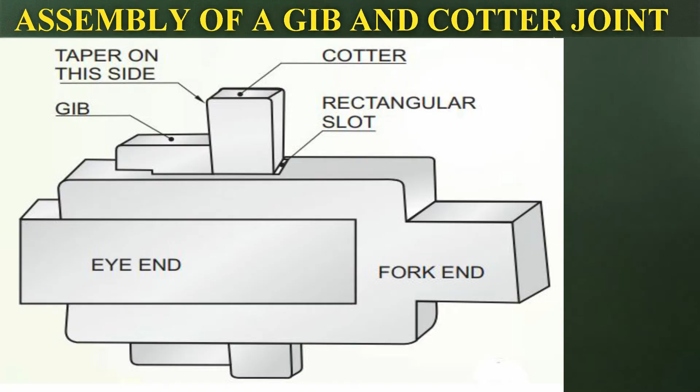Now I will try to explain it using a model of this joint. This is the first rod or first element of this assembly, the fork end. As you can see, the cross section is square, or for this section it is like a rectangle, so rectangular or square section. From the front, this is the front view, and from the top you can see this hole. This is the hole for the cotter and gib.

Next element, the second rod. From the top you can see this is the slot for the cotter and gib. The other two elements are the gib and cotter. This is a cotter, this is a gib, and this side of the gib and the same side of the cotter is the common or matching side. The other two sides are parallel to each other and perpendicular to the central axis.

Also, for the slots for gib and cotter on both rods, fork end and eye end, generally the ends are perpendicular to the central axis and flat, because the tapered side is common for both and the matching side is the tapered side. So you don't have to worry about the taper in this joint.

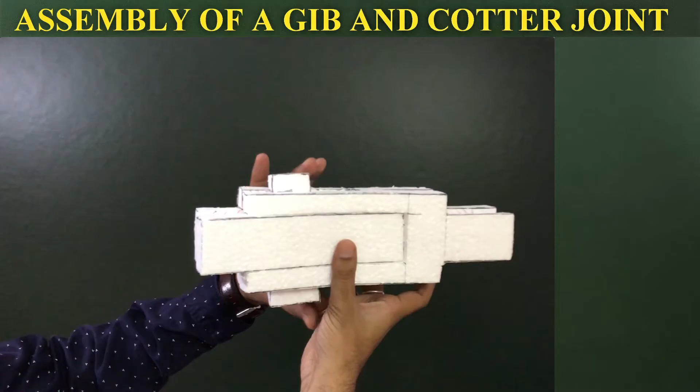Then we can insert this gib like this in the cotter slot, and then we'll push it towards the eye end. After pushing it in this direction, these projections are going to lock this gib on the fork end. Then we can hammer this cotter like this. So this is the final arrangement or final assembly of this joint, right?

Now from the front, this is the front view. From this side, this is the side view of this assembly. The cross section is a square, this is for the fork end, these lines are for the gib, and this last one is the cotter. And from this side, again this is the side view: square, then rectangle, then cotter, then gib, right? And from the top, this is the top view of the assembly.

Now the other thing is clearance. How to decide the amount of clearance, or how to draw clearance in the assembly? Again, I'll try to explain it. This is my first rod, the fork end. Then this is the second element, the second rod, the eye end. We'll insert the eye end like this.

And in this assembly, okay, now it's better. In this assembly, these are clearance: first clearance, second clearance, and this is third clearance in blue color. So this is the amount of clearance after assembling all these parts of this assembly.

And the view in front of you is similar to full sectional view. So in full sectional view, we have to show section portion for fork end, for eye end, and we don't have to hatch for cotter and gib. So this is the front view, sectional front view of gib and cotter joint full in section.

Now we'll start a problem. So first problem in gib and cotter is from pictorial view. So from pictorial view to orthographic views. Problem statement: the figure shows the exploded pictorial view of a gib and cotter joint. Assemble these parts correctly and then draw the following views to scale 1:1.

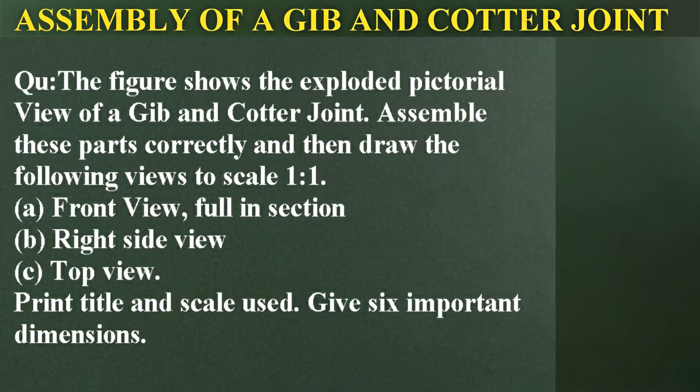First, front view full in section. Second, right side view. Third, top view. Print the title and scale used. Give 6 important dimensions. In the problem figure, fork end and eye end, these two rods are given in pictorial form or pictorial projection. For gib and cotter, given figure is orthographic. So we'll start from fork end.

First, fork end SQ30. Different dimensions are: first is SQ30. SQ30 means square of size 30. So for fork end, the dimension or size of the square is 30. So 30 by 30 is given to us. Second, total length is 112. So this length from this corner to this corner, total length is 112.

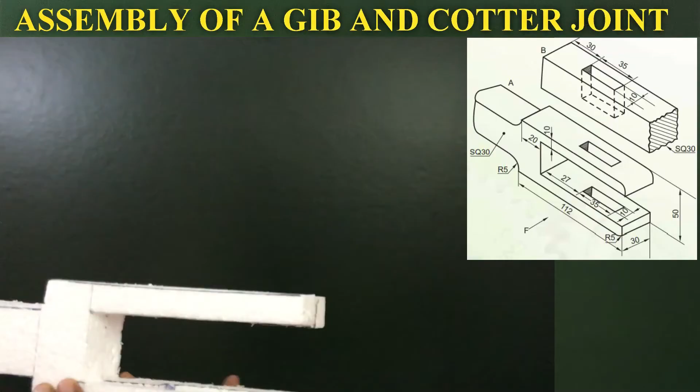Then 30. Okay, so if this width is 30, this must be 30. Then we have 20 distance of inner corner or inner face from this side. So this is 20, this is 20 in the figure, and then after 27. So for cotter slot, this distance is also given to us 27. So from this corner to this point, 27, and slot width 35.

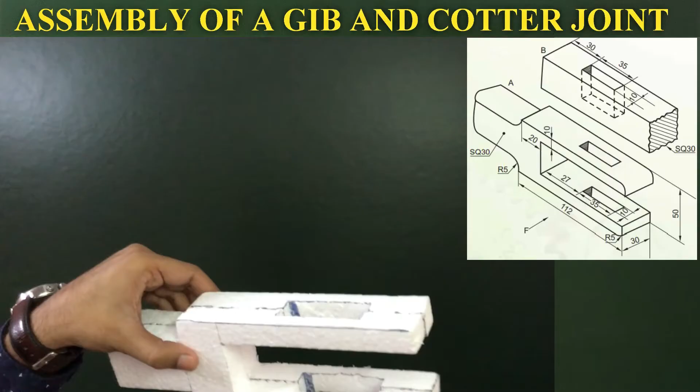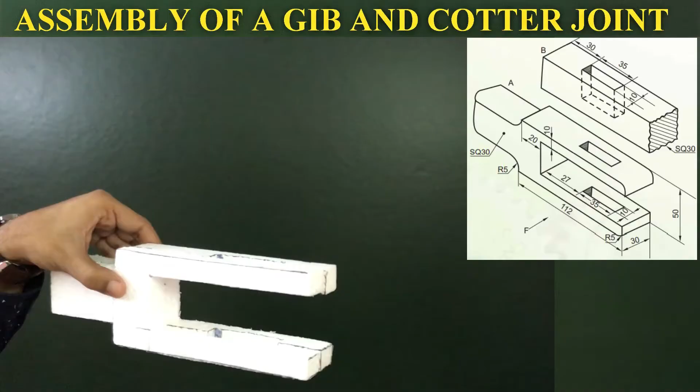And what about upper height? Okay, this height is 10, this is also 10. So 10 plus 10, 20, 20 plus 30, total must be 50. Yes. So this height is also given to us 50. So total 50, upper 10, lower 10, and middle portion of size 30.

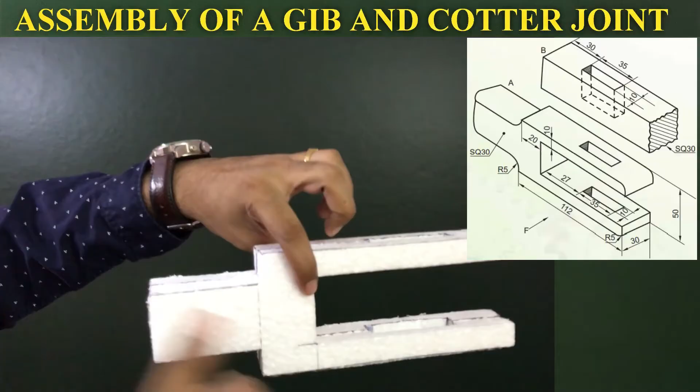Okay, one more thing is given to us, R5. Yes, so in my model these corners are sharp corners, but in your problem figure these are rounded or fillet corners. So we have to use R5 fillet radius for construction work.

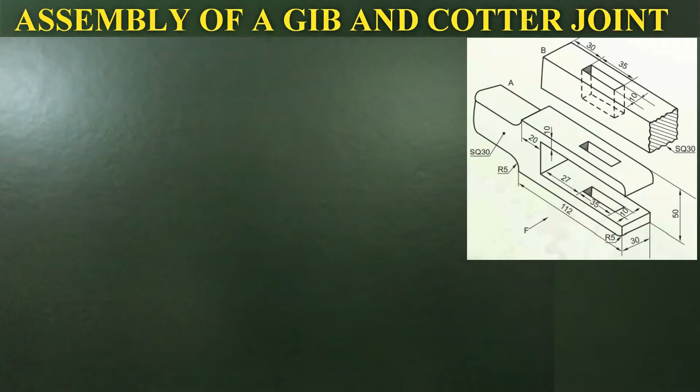Next, eye end. So for eye end again SQ30. So the size of this rod is 30 by 30. Then 30, 35 and 10. Okay, 10 is the thickness of cotter slot. So for eye end, this is 30, this is again 35. So cotter plus gib slot width is 35 for both, and this slot thickness is equal to 10.

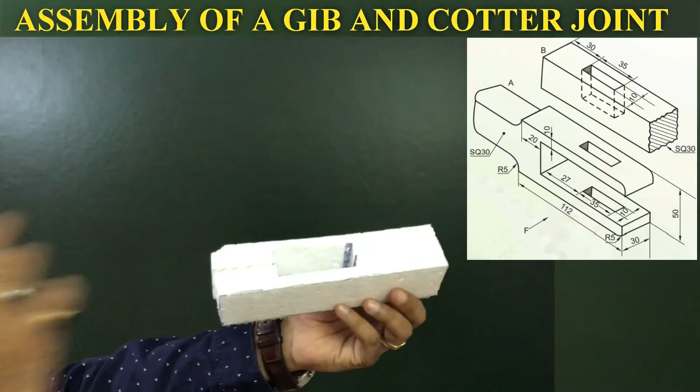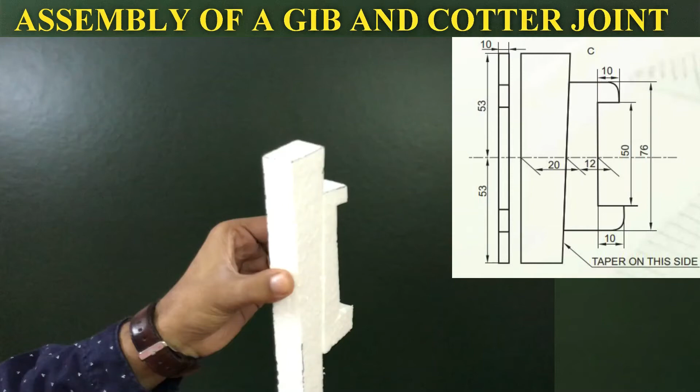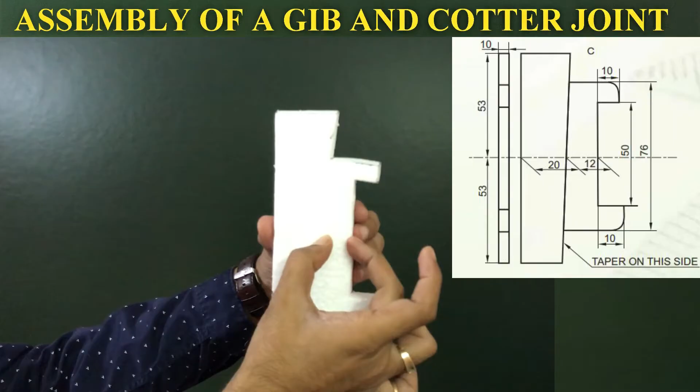Then for gib and cotter, different dimensions are 53, 53, 10. So upper half 53, lower half 53. Then 10 is the thickness of cotter and thickness of gib. Then for central plane, width of the cotter is 20, width of the gib is 12, and these are extra additional projections of 10 each, and again corners are rounded.

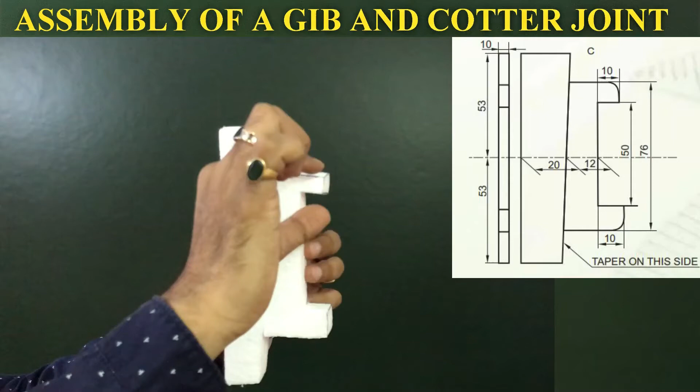Okay, so this height is 50 and this is 76. So 76 minus 50 is 26, divided by 2, 13, so 13 up, 13 down. So these are different dimensions for the given problem.

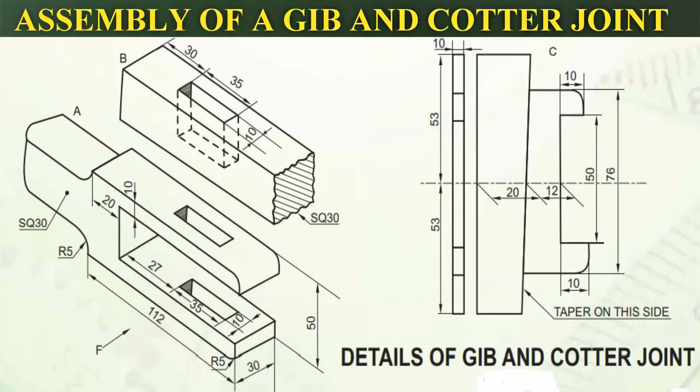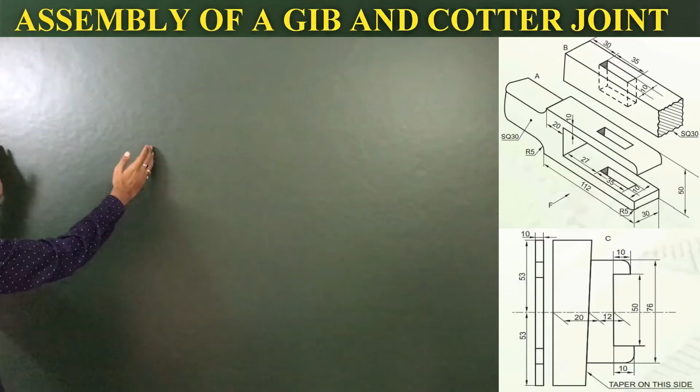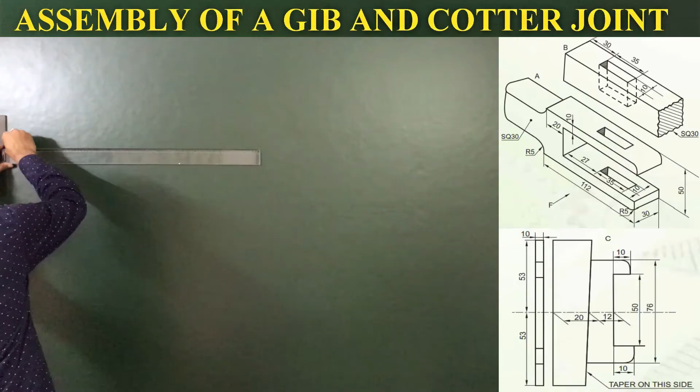Now in the sheet, we will start from its front view, then side view, then top view. So we have to draw right side view, means from the right side on the left side. So after suitable gap for its side view, we will start its front view. So draw first line for its front view, that is center line for front view and side view. Right.

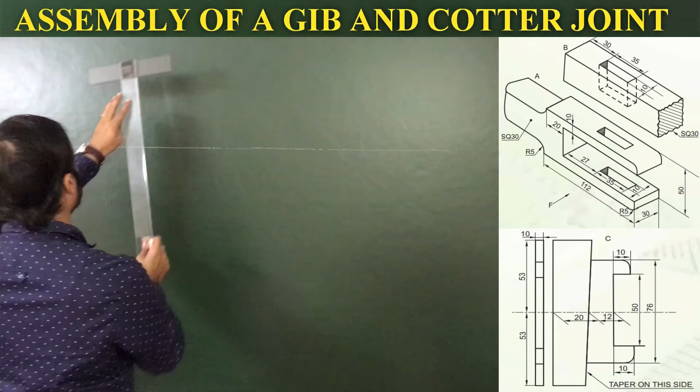Okay, so this is my second XY line, this is my first XY line, reference line, vertical XY line, and this is the center line for its front view. Space for side view, space for front view, and space for its top view. Now in the front view we have to start from its fork part. So SQ of 30, we'll start from square of size 30.

So after suitable distance, again we have to start from suitable distance for dimensioning and for naming. So this is the gap which we have to take. Then this is my first point, now from this point, half of 30 up, half of 30 down. So half of 30, 15 up, and half of 30, 15 down, parallel to vertical line.

Then again after suitable distance, extension of 10 and 10, because this length is not given to us, we can take any distance. So after suitable distance, again suitable means as per space available on your sheet. So as per space available on your sheet, you can extend this end and second end also, right? So again, after suitable distance, total 50 means additionally 10 up, 10 down, right? So 30, then total 50, 10 up, 10 down.

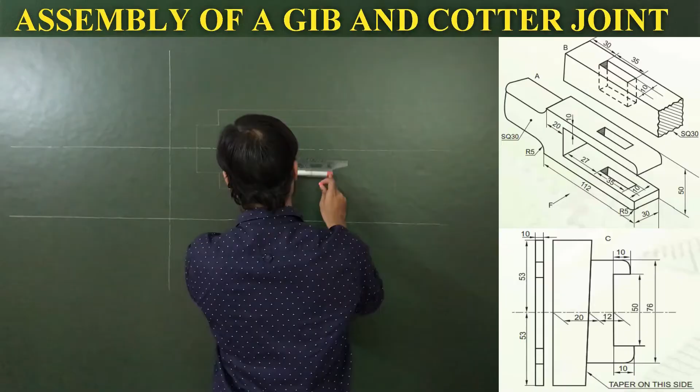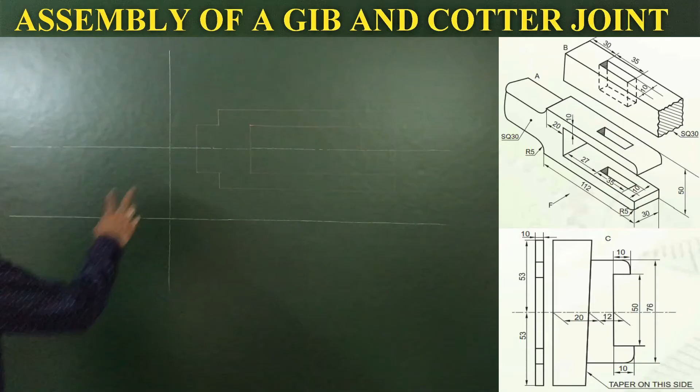Right. So this is the first element of this assembly, fork end, for which any distance, then from this corner to this corner 112, this is 20, this is 30, this is also 30, and we can erase this also, right? So this is first rod or first element of this assembly. Second is rod end or eye end. So eye end means we have to insert eye end like this.

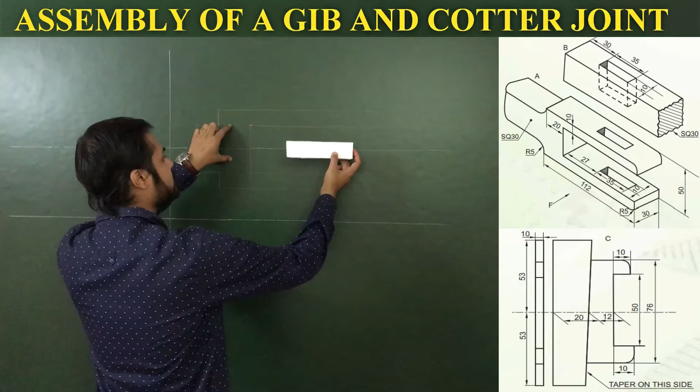It means again we are free to take any length, because total length of the eye end is not given to us. So in your sheet, just try to count the length. Count the length means for rod end, given length is 30, then 35, then any. So for slot, these are slots. This is 30, this is 35, then any. So in fork end, total available length is 112 minus 20, that is 92. So we are free. So in this case, we don't have to worry for the length.

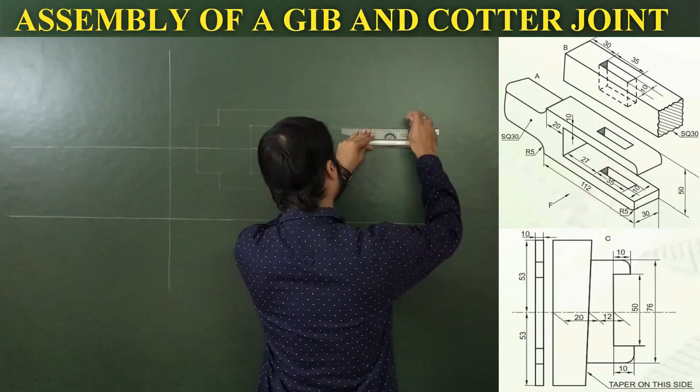Just extend it for 10, 20 or 15 mm as per space available on your sheet. Again, if you have enough space, you can extend. Otherwise, after this corner, 10 or 20 or 15 mm. Now let's mark slot on fork end and eye end. So for fork end, the distance is 27. So from this corner, the distance is 27, and cotter slot 35

for fork end. So for fork end, these are limits, or these are dimensions, right? Then for eye end, 30 and 35. So from this point after 30 and then 35. So now we have to mark 30. So from this point we have to mark 30. This is 30, this is 30.

It means for fork end 27, for eye end 30 minus 27, this additional length or this clearance will be formed, and the amount of clearance is 30 minus 27, 3. Similarly 3, 35 from this point means clearance of 3, right? Now next we have to insert Gib and Cotter. So again we know that we have to insert Gib, then we'll insert Cotter, but this is the assembly, this is clearance, and this is also clearance, and tapered side is common.

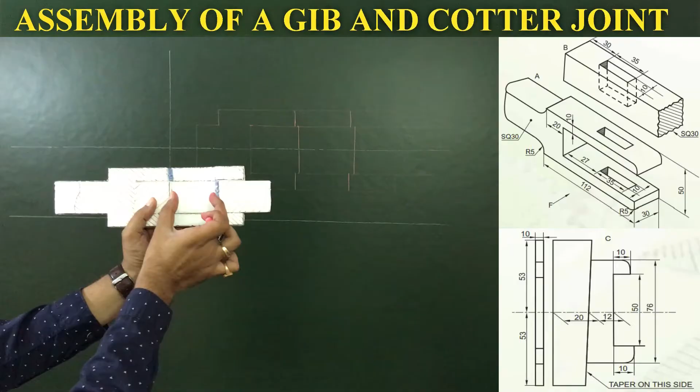So we have to start from this section. This section means from this point. So this is the space available for Gib and Cotter, means we have to use this common space. Again, in this figure, from this point to this point, this is the common space available, which is equal to 35 minus 3. So total width available 35 minus the clearance 3 is 32. So the common width available is 32. And for Gib and Cotter, if you fit the Gib and Cotter, total space available will be same. It means 20 plus 12 is 32.

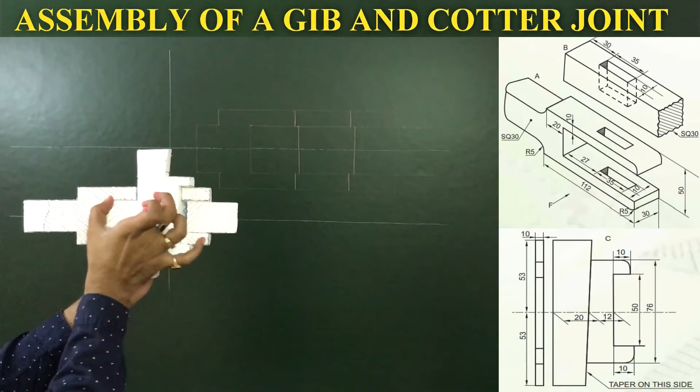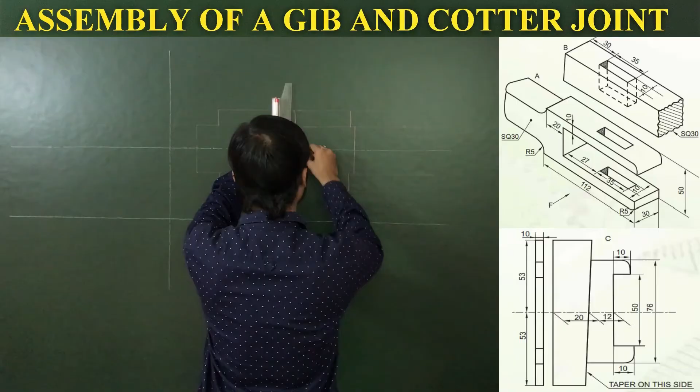Yes. So we'll fit Gib and Cotter in the common space available on the assembly. So from this point, for Cotter, 53 up, 53 down, and similarly for Gib, total is 76. So half of 76 up, half of 76 down. So we'll start from Cotter, from this point, 53 up, and 53 down.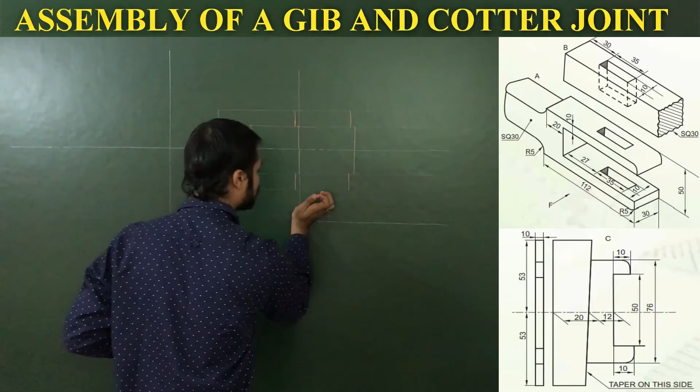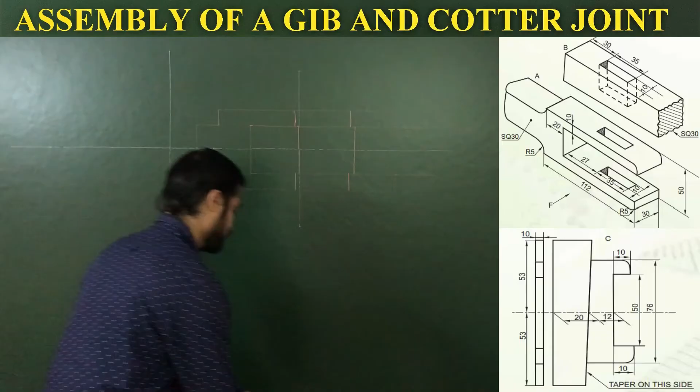Okay, so I have to change this line because I don't have enough space for the cotter. But in your case, please check whether you have enough space or not. Okay, so 53 up and 53 down. Then, width of the cotter or thickness of the cotter. Thickness is 10, but central width is 20, and taper is given to us, but we don't have upper and lower width. So what to do in this question? Again, it's a very interesting question.

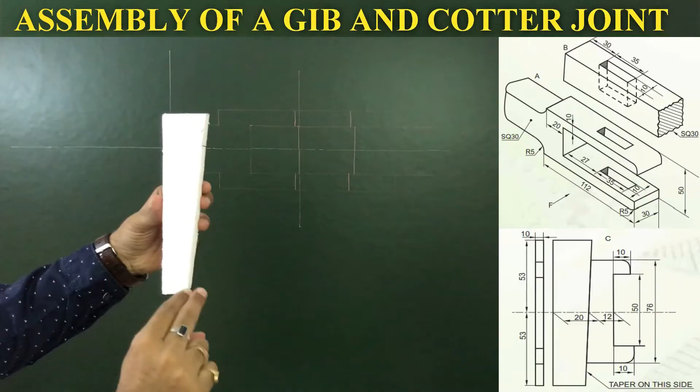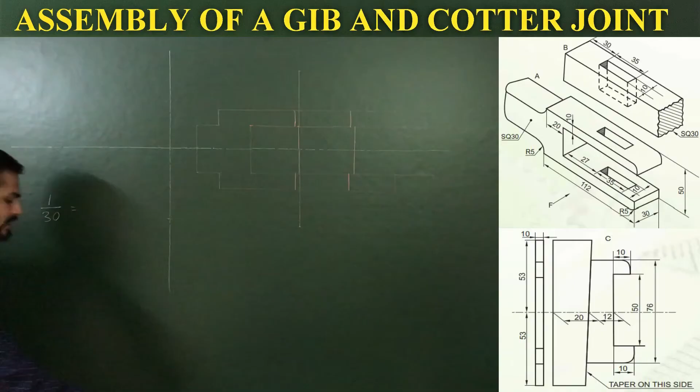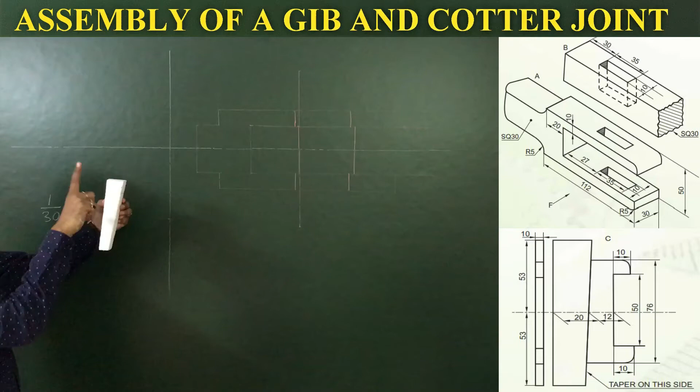Central width of the cotter is given to us, 20, length 53 plus 53, but amount of taper or angle of taper is missing. So general amount of taper, we know that general amount of taper is around 1:30. So we can calculate upper and lower width of cotter using 1:30. 1:30 is equal to additional length or extra length by total height, because this angle is equal to 1:30. So extra length divided by total height is equal to taper 1:30.

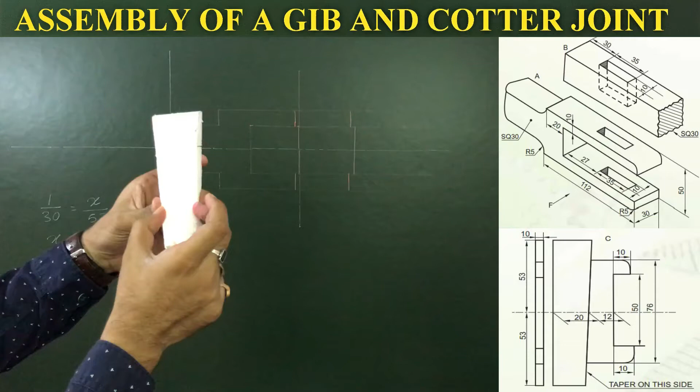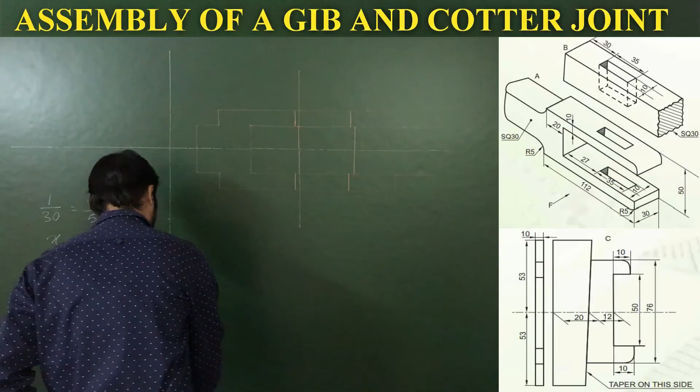So say that amount is x, and for upper half it is 53. So x is equal to 53 by 30, say 2 mm. It means upper width of the cotter is 2 greater than mean width, and lower width of cotter is 2 less than mean width. So 20 plus 2, 22, 20 minus 2, 18. Now we can mark 22 and 18 for cotter. So 22 and 18, right?

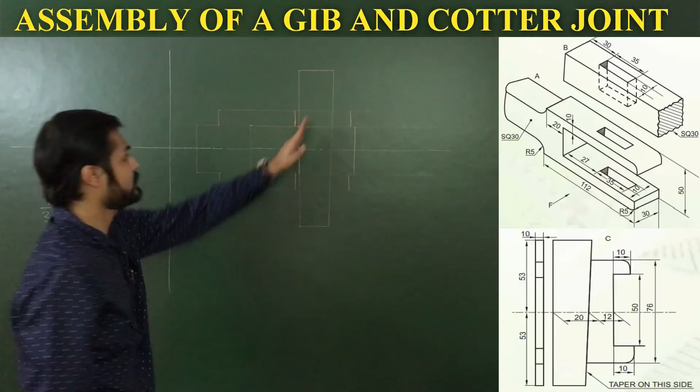Okay, and this taper or amount of taper is same for Gib, right? So the taper is common for both. It means we don't have to worry about the taper. Simply we'll start projection work or drawing work of Gib from this point. This point means 3 back. It means intersection of this line. After 3, this is the point, right? So from this point again, upper half total 76 by 2, lower half 76 by 2.

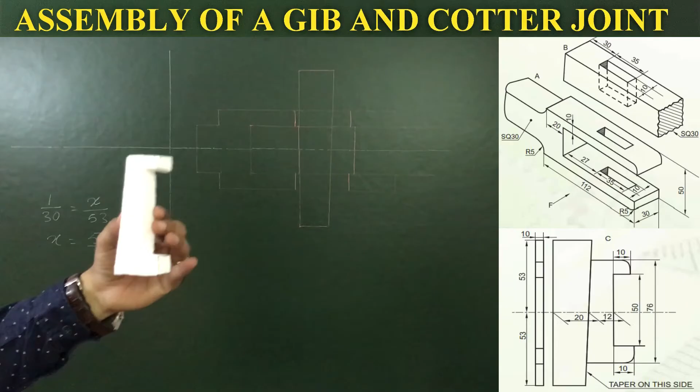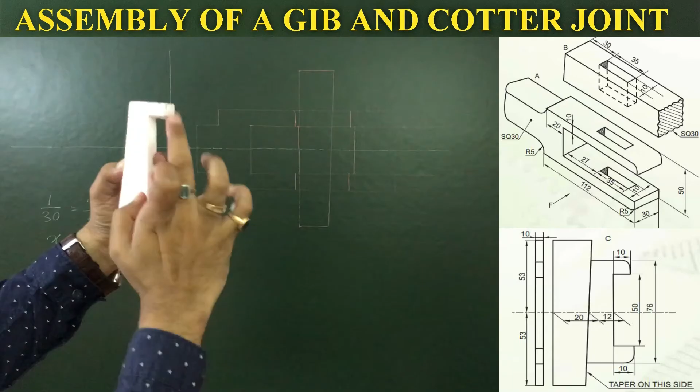So from this point, okay, one more thing, we are in this point, so we are here. Now this height is 50, this height or gap or say length is also 50. So from this point, half of, sorry, it's not 50, it's 25. So 25 up, 25 down, then 10, 10, then up, down, and then back. So from this point, total 25 up, half of 50, 25 down, half of 50. So total is 50, then 10, 10.

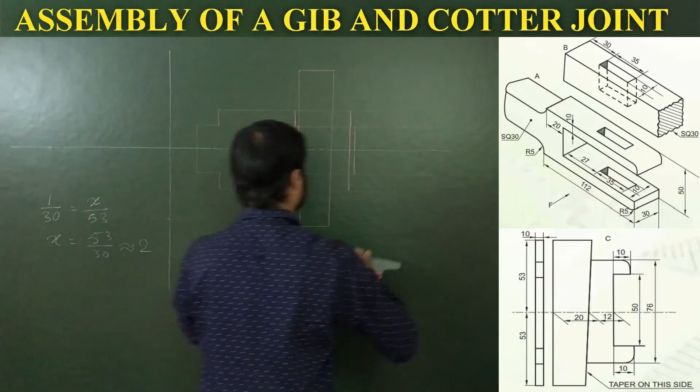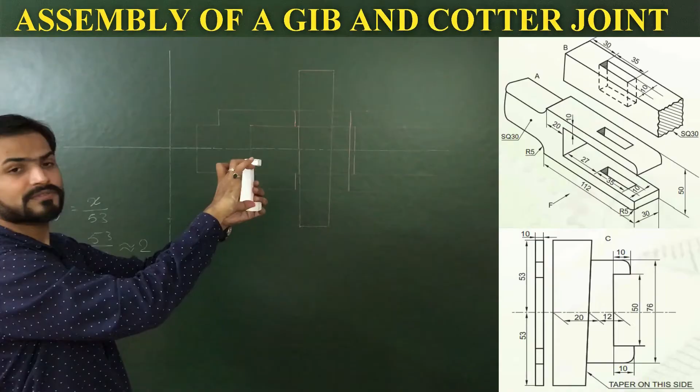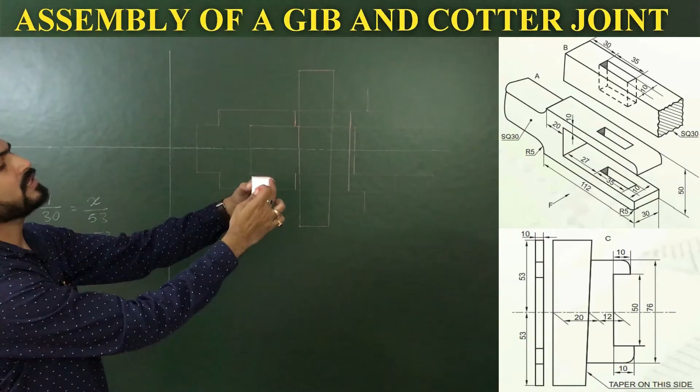So from this point we can mark 10 like this, 10 like this, then again total is 76. Here the total height is 76, and we have 50 with us. So 76 minus 50, 26, 26 by 2. So 13, 13. Now the additional height is 13. So from these 2 points we can draw lines of length 13, 13 up and 13 down. Now simply we can draw lines parallel to center line up to cotter.

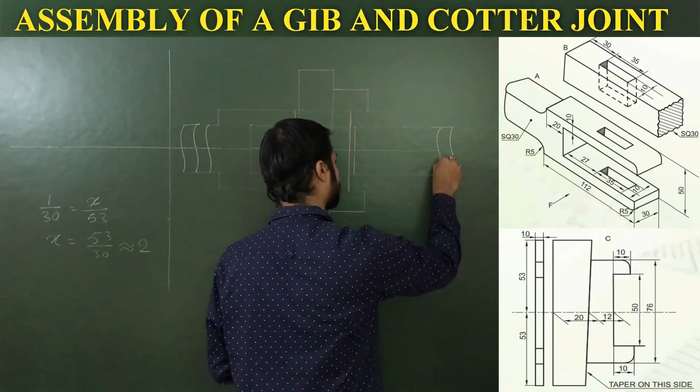So from this point, line parallel to center line up to cotter. From this point, line parallel to center line up to cotter. Right. Now we can use dark pencil and we can decide limits of hatching. We have enough space, so we can extend it also. So after extension, these are limits for hatching. Again after extension, these are limits for hatching. Right.

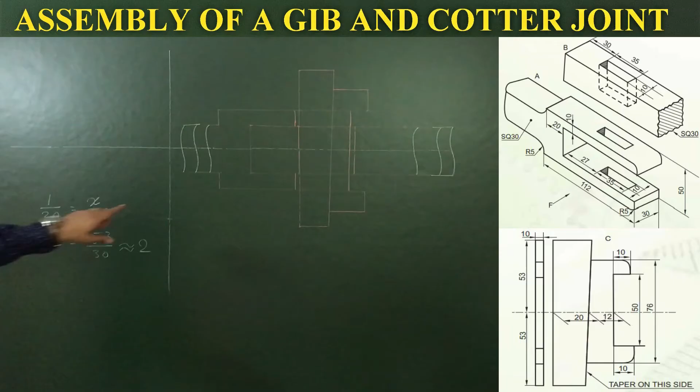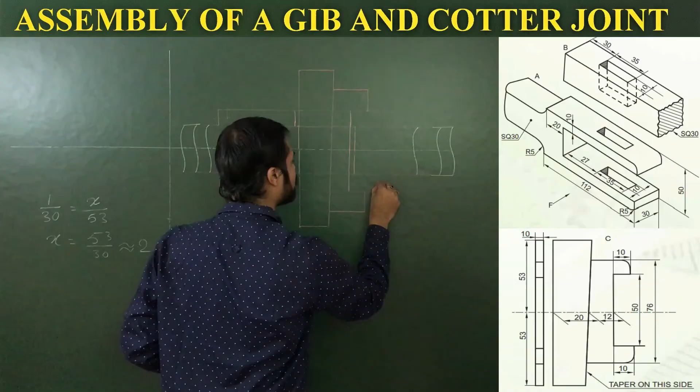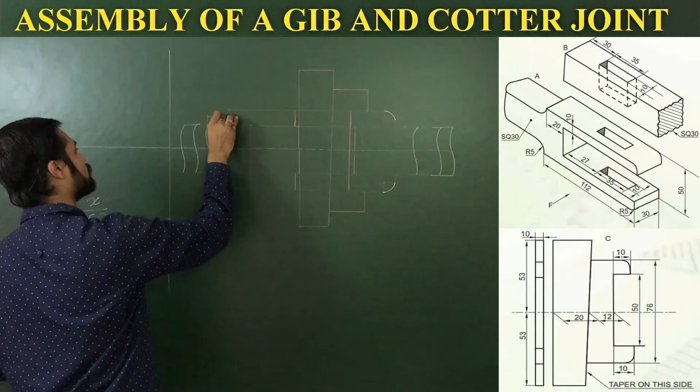Now for fork end, these corners are sharp corners as per problem figure. No, we have fillet radius R5. Okay, so for this corner and for upper corner we'll go for R5. R5 means from this point 5 up, 5, this is the center, 5 down, 5, this is the center. Similarly for these two corners, 5 and 5, 5 and 5. Okay, so these corners are, no, again my mistake. These are rounded corners, and better. Okay.

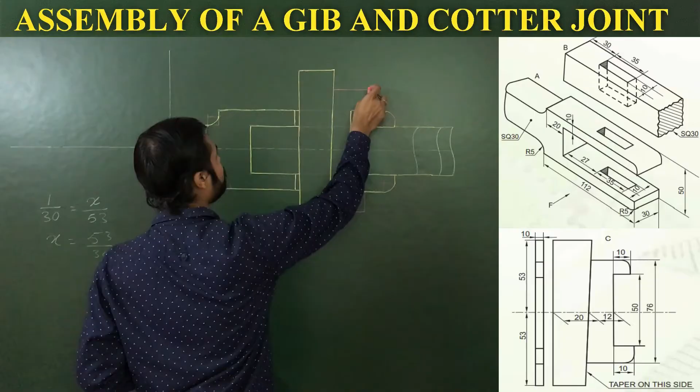Then on Gib, again these corners are rounded corners, but we don't have data, so again we'll go for R5, 5, 5. Then hatching part.

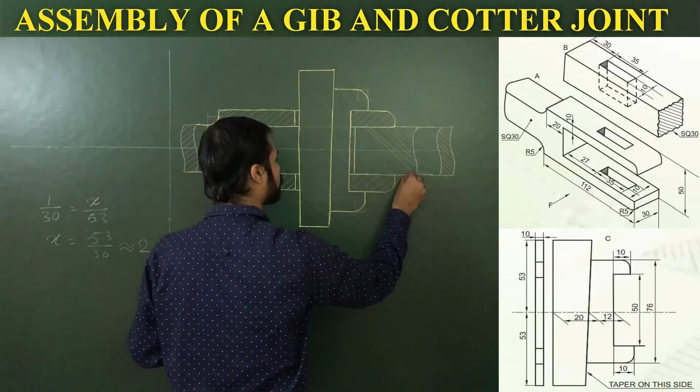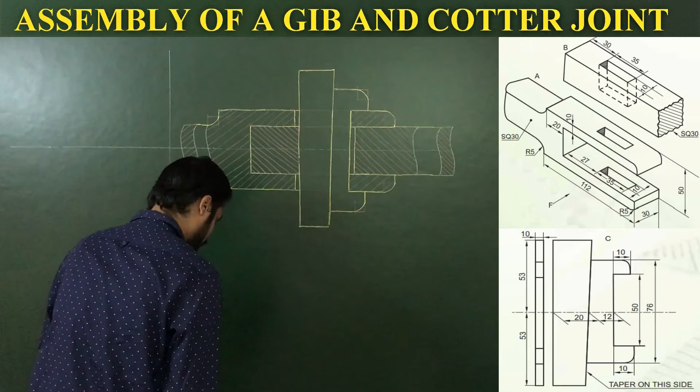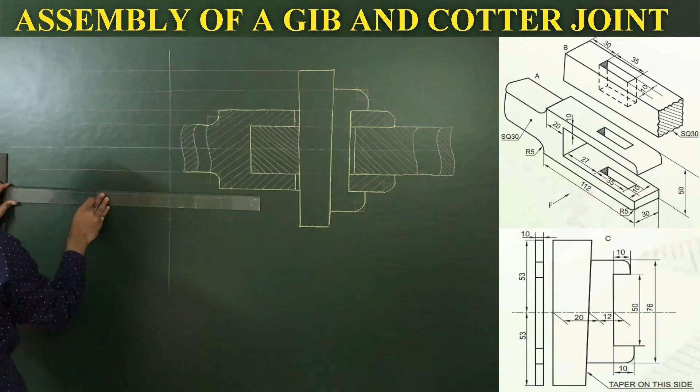Okay, then next is side view. So for side view again we have to draw lines of projection or projectors of front view. So we can use limits of front view like this. Right, and similarly we can draw perpendicular lines also, perpendicular to first reference axis or perpendicular to xy, by extending all important limits or corners, or by drawing lines from all corners of front view.

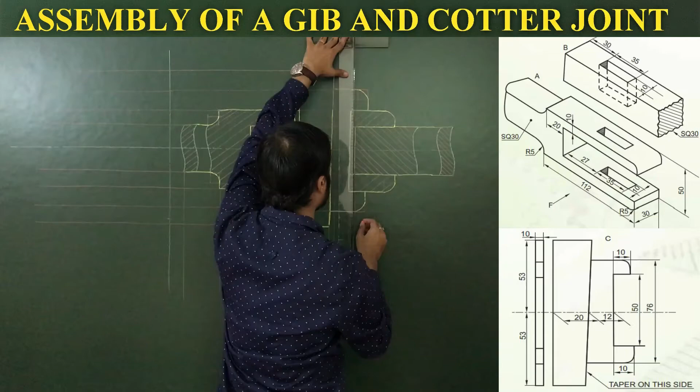And a reference line for front view and top view. Okay, so this is the space for its side view, and for side view we know that the section is similar to a rectangle and square, a combination of square and rectangle. So again we can draw a center line or line of symmetry for side view.

So this is the line of symmetry for side view, center line or line of symmetry for the side view. From the center line we will start from that side, means for the eye end the section is square. Square means 30 by 30. So from the central point, 30, 15 up, 15 down, total is 30. Similarly 15 and 15, so total 15 and 15, 30. These are the limits.

So first, square of size 30 by 30 for eye end, like this. So it's a square of size 30 by 30. Then for fork end, 10 up, 10 down, and the width is same 30. So again up to next limit, 10 up, 10 down.

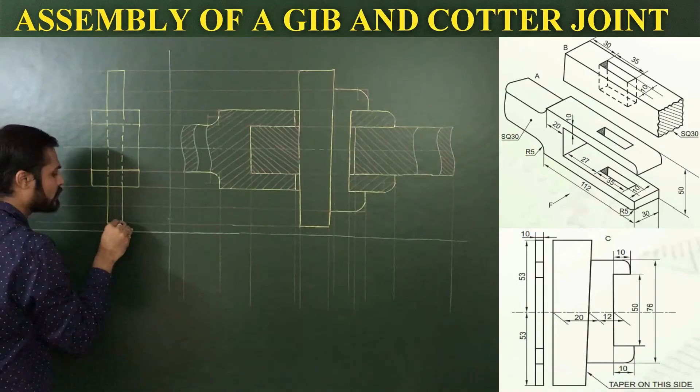Right, hidden inside the rectangle. Inside the rectangle means inside the fork and eye end, and then dark visible throughout cotter, and this is the edge of Gib, edge of Gib.

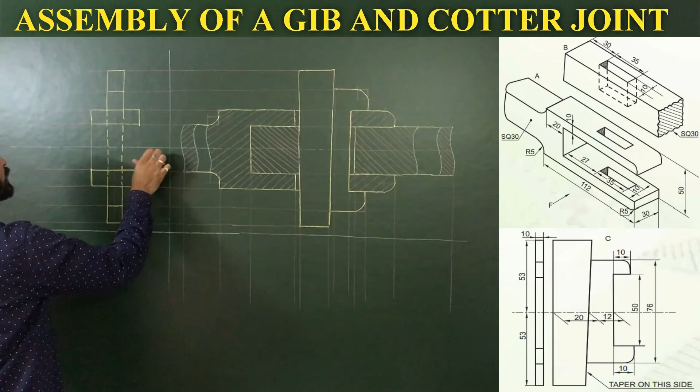And from that side, means from this side again, view of eye end is sectional view, so we have to hatch it.

Then for its top view, again for its top view we can use projections, or we can start from the top view directly without using side view, we can also start from the center line. So better is first we can write a center line. No, we'll use projections of side view because this method is better, I guess.

So from this point at an angle of 45, or you can rotate also from this point. This point means from the common intersection point of first reference and second reference, this much as arc, and you can rotate.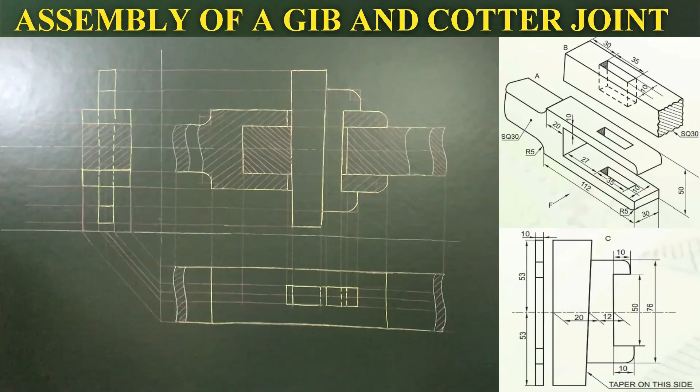Sectional representation in top view also. So yes, so in place of dark straight line, we'll show ends with sectional representation, right? Next, dimensioning.

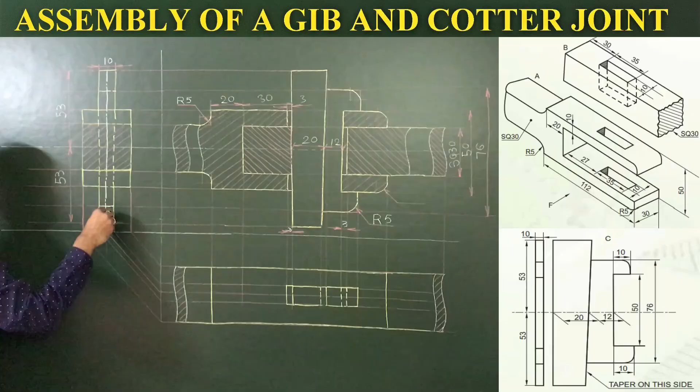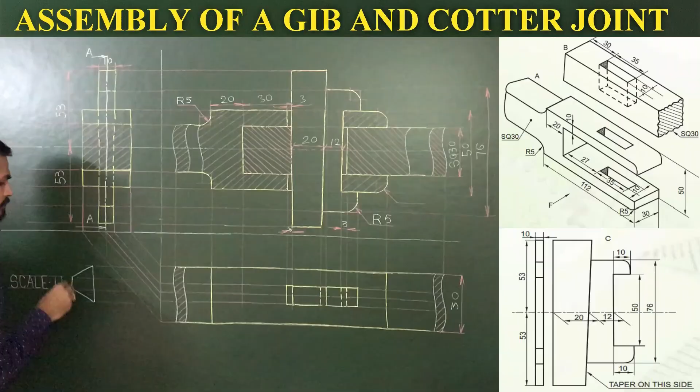Then scale used and symbol of first angle projection method. Sorry for the missing part, writing work, and the second circle of the symbol, because space in my phone was not enough. So this is the final assembly of Gib and Cotter, front view, full in section.

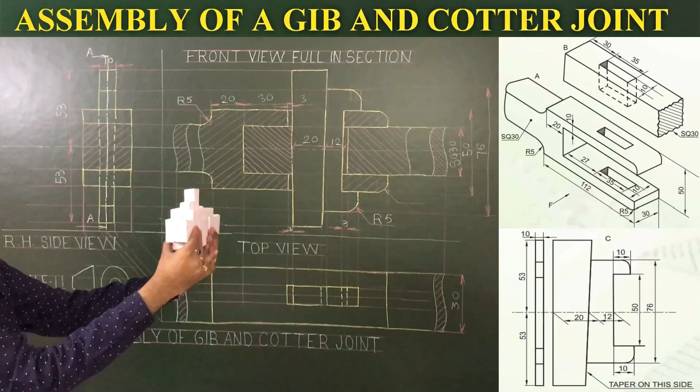Then from that side, view like this. So this is the side view, and from the top view, this is the top view. So this is it from my side.

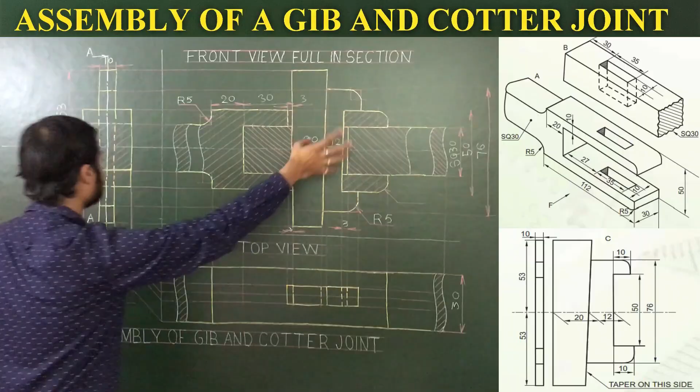Now I'll request you to please draw this assembly in your sheet. Please start from its fork end, then insert eye end, then cotter, then Gib, then project its side view, then top view. Do all dimensioning, write headings: front view full in section, right hand side view, then top view. Scale used 1:1, projection symbol first angle projection method, and overall heading assembly of Gib and Cotter joint.